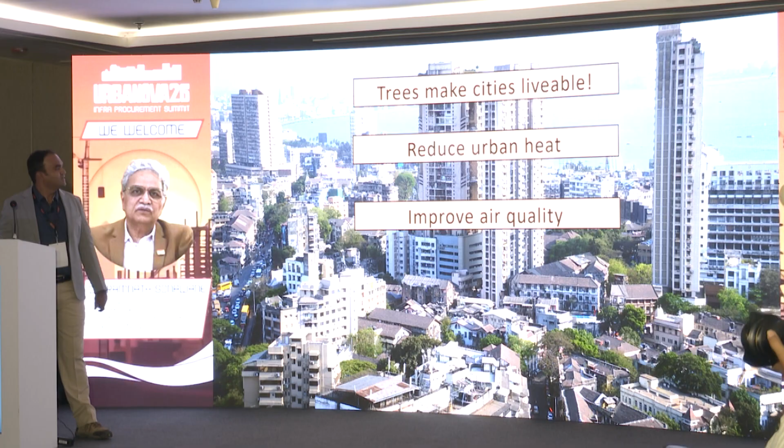This is also a no-brainer. We are seeing all the repercussions of construction and air pollution in the city, the bad air quality that we have. And trees are the organisms which help improve the air quality of the area.

It also helps improve the mental well-being of our people. If you don't believe me, just look outside the window. You can see beautiful trees and tell me you're stressed by looking at that view.

It also helps increase property value. This is very important for business owners and project owners, because people think trees are a liability and it's costing them money. But the more trees you have in your property - I'm not talking about trees you plant after construction, but the trees which you retain in your project during construction - those trees will help increase your property value.

I like to bring this out in the first 5 minutes of a presentation. And I understand the challenges that you, as engineers and project managers, have to go through in managing trees while building big roads and big buildings and everything.

And we understand the challenges you have, specifically working in a complex urban environment. One of the speakers previously mentioned they had to deal with 42 utility companies just to construct a road. I would say you now have to deal with 42 plus 1. Trees are also part of infrastructure now, so you need to think about those trees as well.

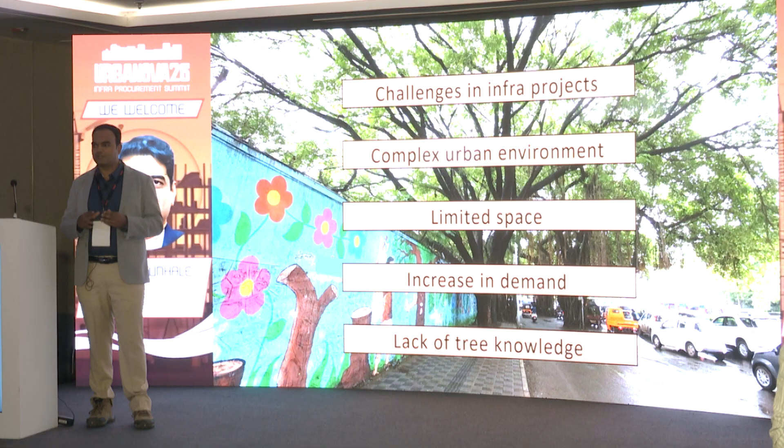And throughout all this, the big challenge that I see is that there's a lack of tree knowledge, or there's more of a misconception about trees going around. So let me help change that misconception for you.

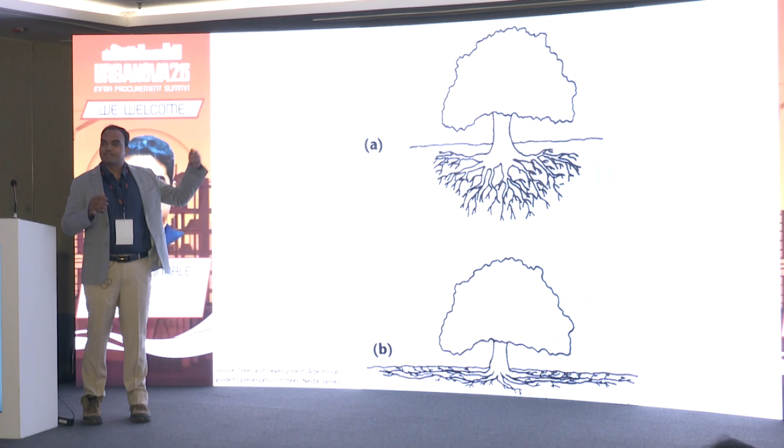Okay, I want a little bit of audience participation once again. By show of hands, could you tell me how tree roots grow? Is it option A, where the roots go deep within the canopy of the tree, or option B, where it spreads all the way around the area and not very deep?

So how many of you think it's option A? Okay, not bad. How many of you think it's option B? My guess was right. So this is the misconception that's going on.

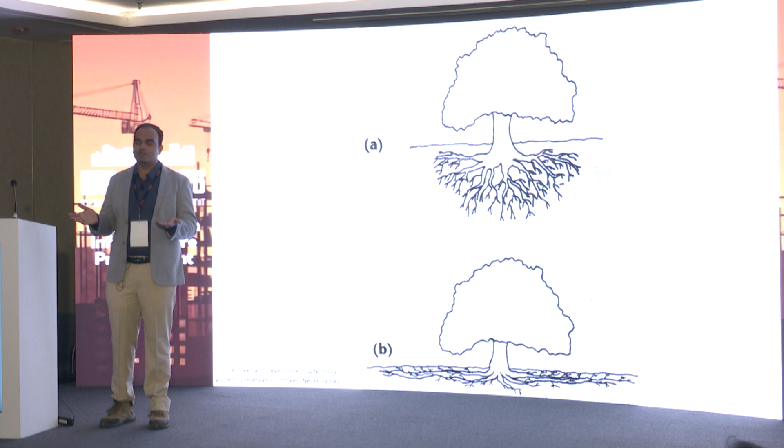Everyone thinks that tree roots stay within the canopy and go very deep into the ground, which has been proved wrong by a lot of scientific journals and papers. A lot of trees have their roots spreading laterally all across, beyond the canopy of the tree. And it doesn't grow deeper than maybe 1 to 1.5 meters, or 2 meters at times. It doesn't go beyond that.

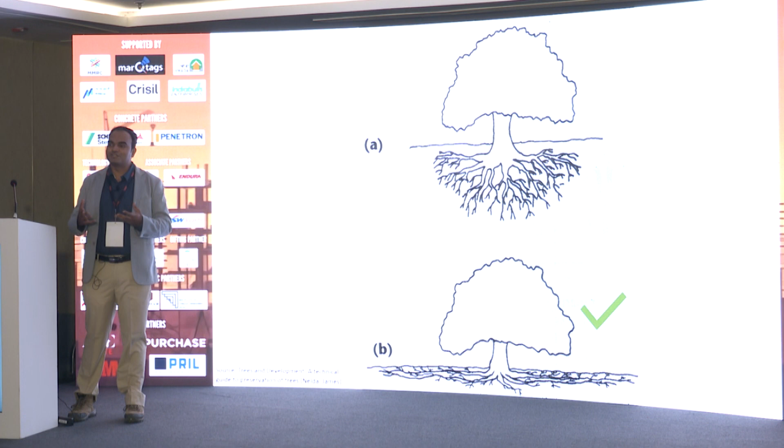But in certain cases, obviously, in dry and arid regions where there is lack of water, tree roots do go deeper down. But in an urban environment, you will not have trees going deeper than 1.5, or at most 2 meters. So I hope you can have some consideration towards tree roots when you build your next project next to a tree.

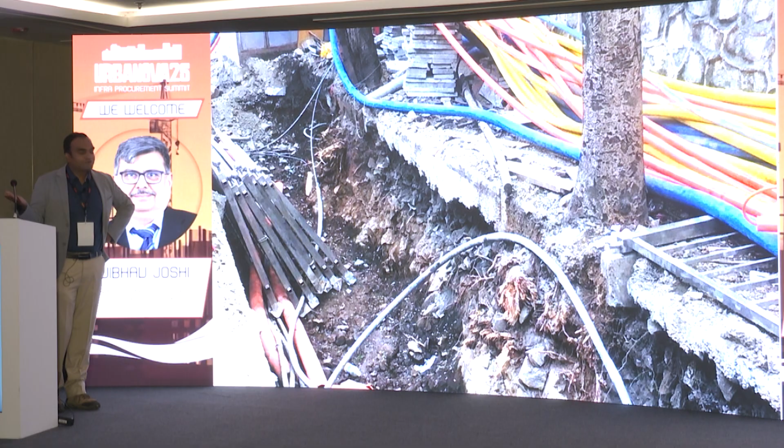To bring it forward, this is a common view that I come across when walking on the streets in Mumbai. Not blaming anyone here, but we could have done better, right? These roots could have been saved, these trees could have been saved.

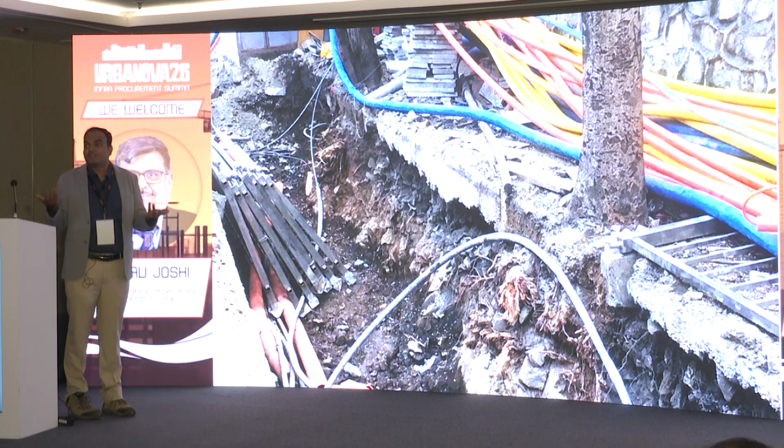They could have been saved because above ground the tree looks fine, but you come out, you do a utility trench, you put in the utility, you fill up the trench, the roots are damaged, and the next monsoon, the trees are falling. So people are dying from falling trees as well now. That's a very big problem we have in our construction industry.

And I don't blame you, it's completely understandable because you have your other priorities, and you need to know that the trees are protected in a way that they stay there for a longer time. But that doesn't happen every time.

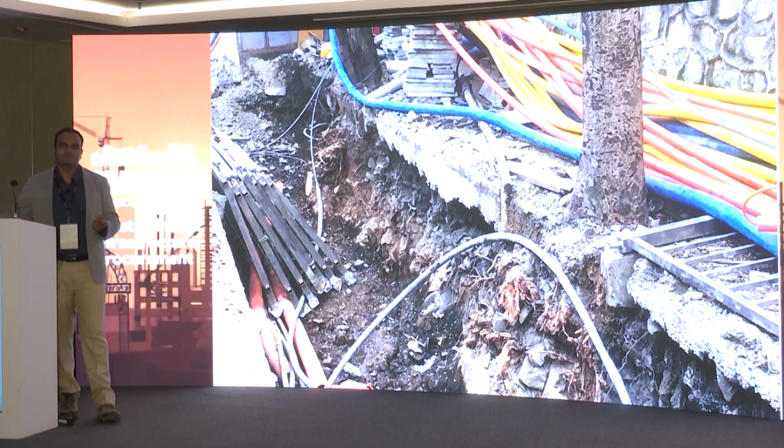And that's why when we work with a lot of engineers and architects, the most common question I get asked is, how close to the trees can I build? And this is the start of an avalanche basically for us. If you're asking this question, that means everything you have done before is wrong.

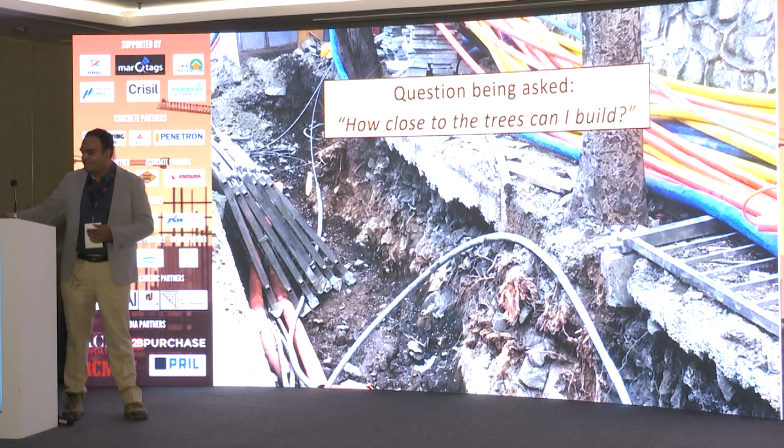What we expect, or what we hope, is that you'll start asking how much space would this tree need? Because your construction also has to go hand in hand with the environment. It's not just on paper, it's not just in your presentation that you're doing a lot of environmental benefits, but also on the ground, the end user needs to benefit from your work. And that is what I'm trying to showcase here.

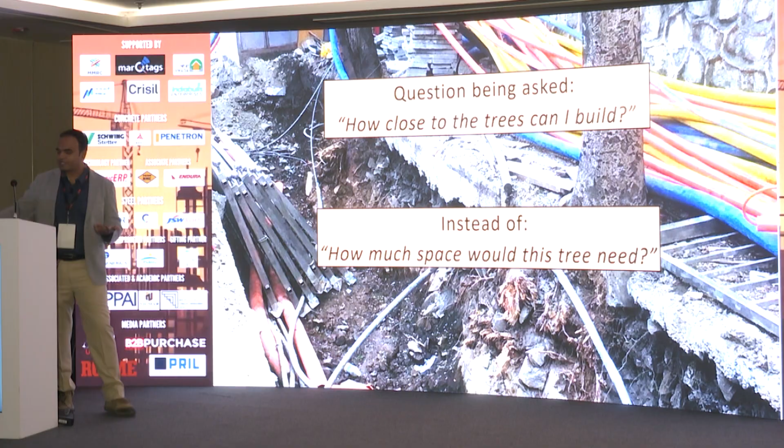To answer this question, a lot of engineers and architects ask us how to do this, but we need to ask how much space would this tree need. So there is no one right answer to it.

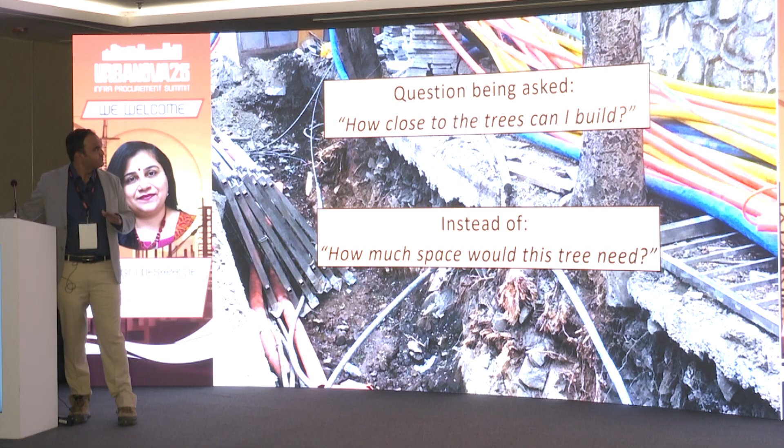To understand the answer, I would like to take you through the phases of construction, which I'm sure you're all familiar with. Notice the change in colors as I go ahead. First is planning, followed by designing. Then you have the pre-construction stage, then construction, and then post-construction.

So at what stage do you think the best tree preservation can be done? It's the planning and designing stage. If you don't think about trees in the planning and designing stage, you would definitely have lost the battle by the pre-construction and construction stage.

We get approached by a lot of companies to save their trees when they've already dug up a huge excavation pit right next to a tree, and they say, 'oh, my tree will fall, please can you come and help me out? Can you fill up the pit for me, please?' Then I can see what we can do. But that doesn't work in the real world, it doesn't work like that.

My urge, my prayer to all of you today is, try and consider trees right from the planning and designing stage, because that makes a hell of a difference. We don't have a magic wand. We cannot come to a site and say, okay, this tree has been protected, it won't fall ever. But if you involve us right from the planning and designing stage, we can identify which trees can be kept and which cannot, and how the ones kept can be protected in a more scientific and comprehensive manner. Anything that happens during construction and post-construction stage with the trees, it's already too late.

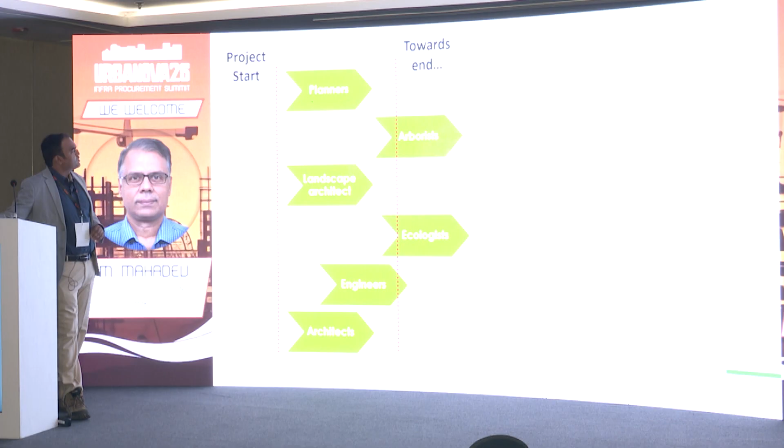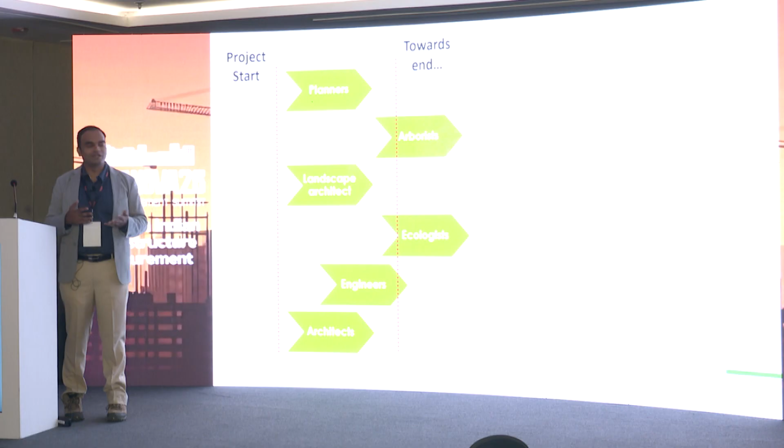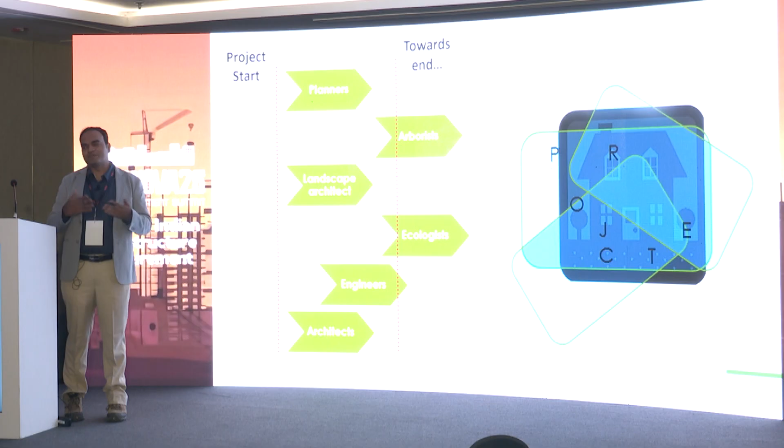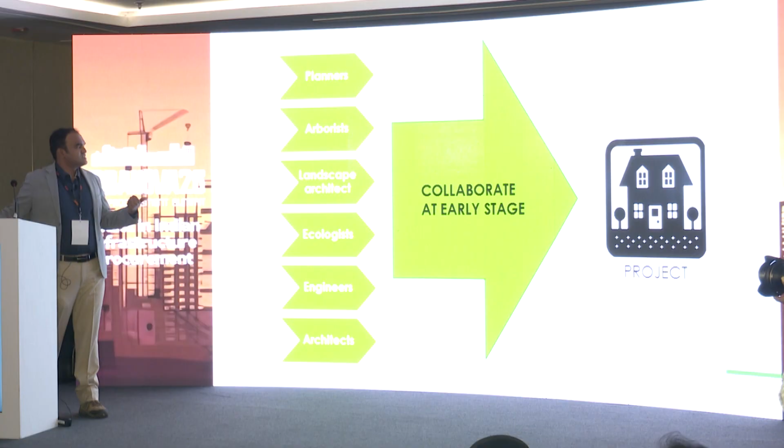Your project is completed, but in a very... so what we suggest is you collaborate at an early stage, get all the experts including arborists and tree experts involved from the planning and designing stage, and then you have a much better collaborative approach towards the project.

So what do we do as an arborist for an infrastructure project? We conduct initial tree survey, do impact assessment, identify design conflicts, define and enforce tree protection zones. We also help optimize which trees to remove and which to retain, assist with changes in the field, communicate with project managers on what needs to be done with the trees, and facilitate completion of projects. So we are there to help you out, not to stop your project.

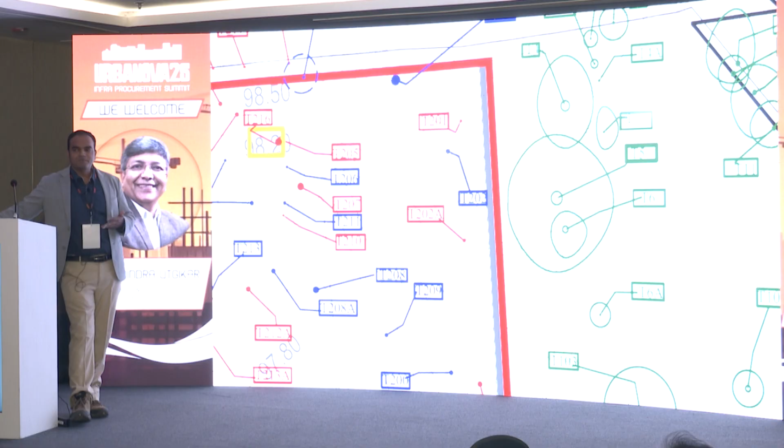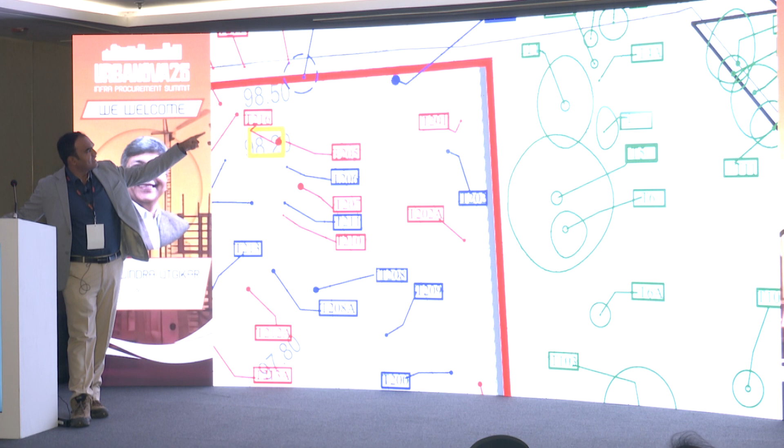So what do you mean by initial field survey and impact assessment? This is a typical plan of a tree survey. On the right, you can see the trees in green with the canopies marked — they are to be retained. The red line is the construction boundary where excavation is going to happen, and all the trees inside are to be removed. This is a very basic approach we take when approached by people during the construction stage or just in the pre-construction stage.

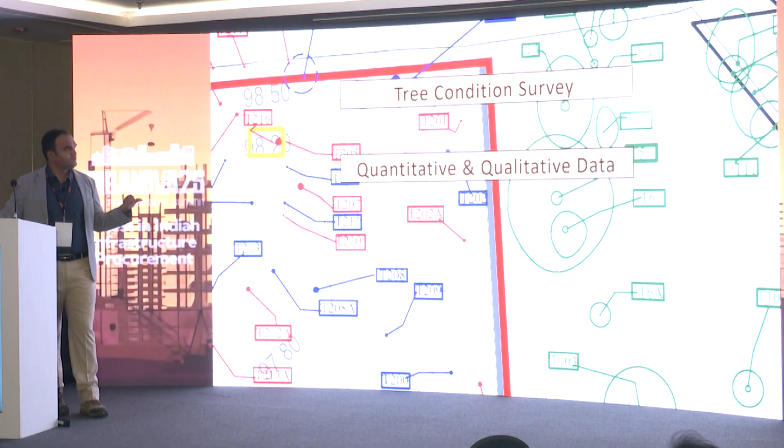So there's hardly anything we can do. We conduct a tree condition survey, collect the data of the tree, superimpose it on your project layout, and tell you which tree to remove and retain. But a better approach to this is doing an impact assessment.

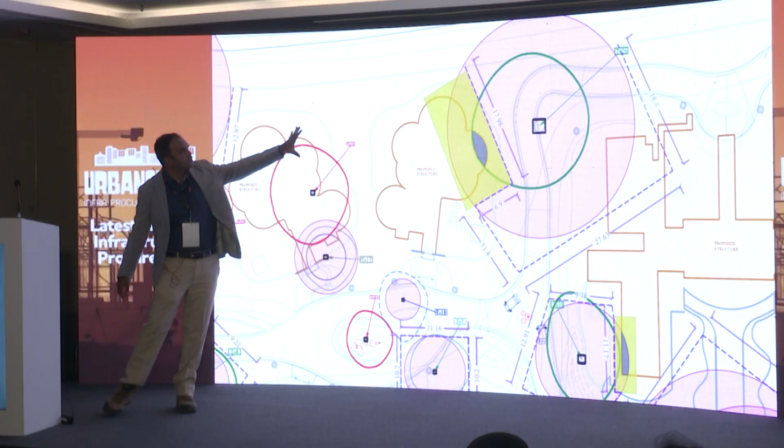So we do a tree impact assessment, or an arboriculture impact assessment, wherein we map each and every tree with their canopies and their root protection zone. This green line that you see is the canopy of the tree. The pink hatch is the root protection area, showing how much ground protection the tree requires for your construction.

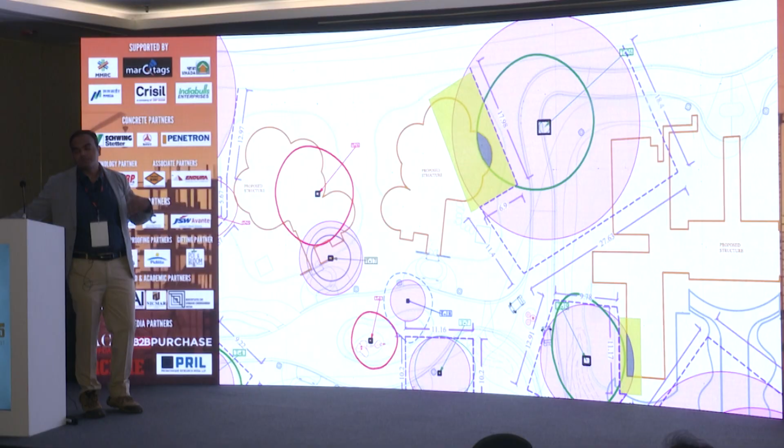Then we recommend which areas need ground protection and where pruning is required. All this planning is done, and the trees marked in red are the ones which need to go, because there's no way we can save them. If there's some design flexibility, yes, we can save them. In some areas, we've tried to keep the tree as much as possible. This is what we try to help you out with — engineers and architects — with regards to trees.

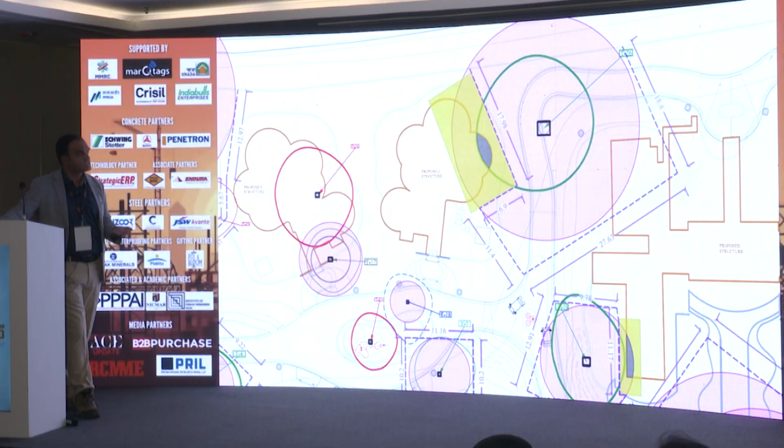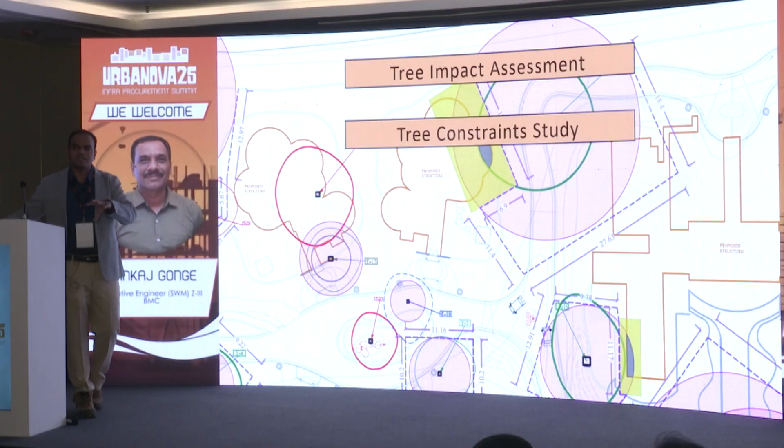It's called a tree impact assessment, and it also includes a tree constraint study. So we identify areas where there's major conflict between the trees and the construction, and we help you minimize those conflicts. We give you tree and ground protection plans.

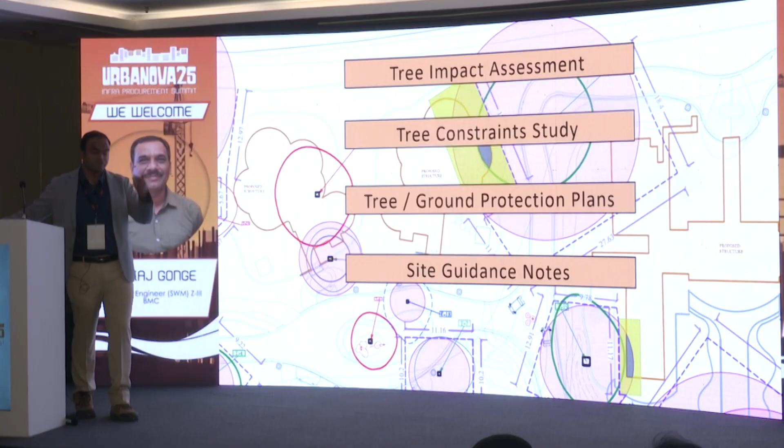We give you site guidance notes on how to go about it. We don't just talk about it, we give you a proper methodology and a method statement about how to go about it.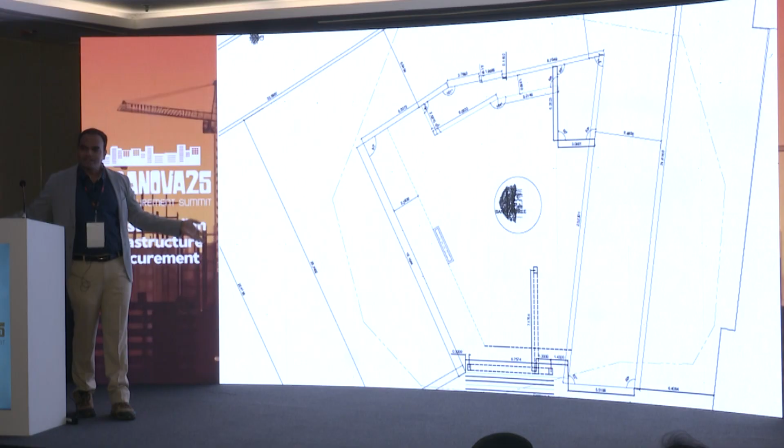They showed a tree in the middle of the building, and they said, okay, this tree needs to be saved. We were like, this is not possible, we need to go back to the design board and come back with better plans. But they said no, everything is in place as usual, we have to go ahead with the plans now.

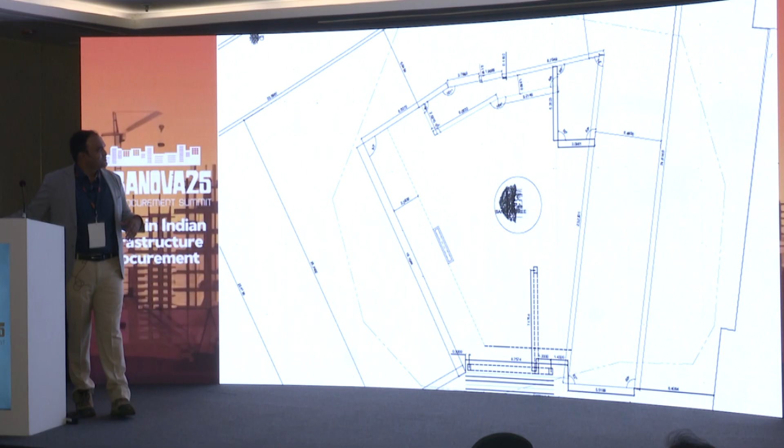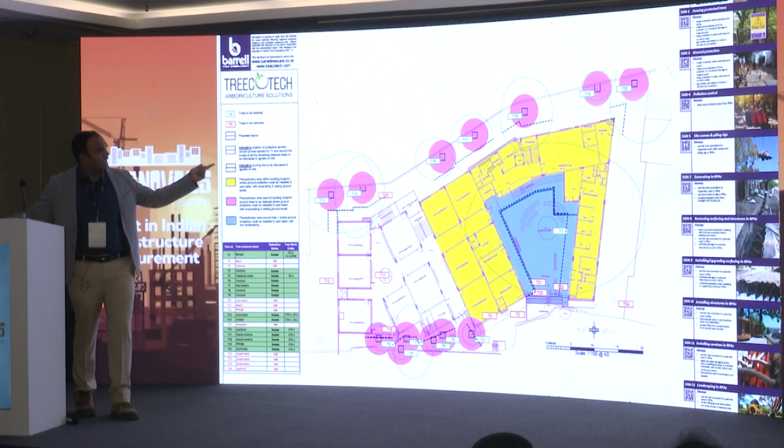So we went to the site and did the assessment. This is what we came up with - a very simple but very effective plan. The hatch in yellow is where all the ground protection measures need to go, and the hatch in blue is where all the root protection measures need to go.

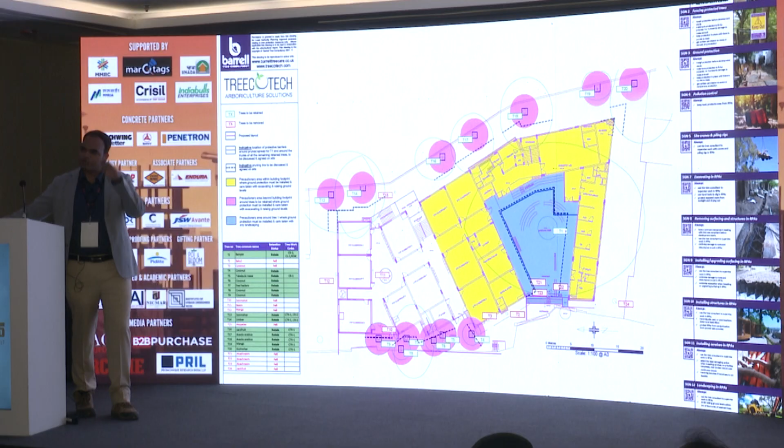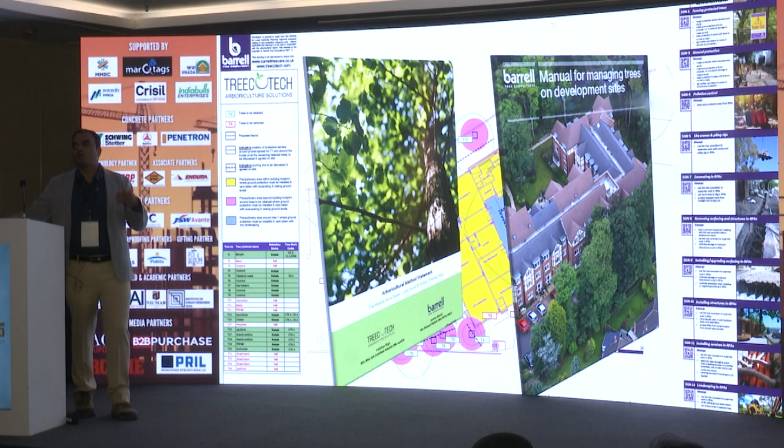With all the measures given in the plan itself, site engineers can quickly scan a QR code and see what needs to be done, along with all the method statements. We also supply a method statement and a manual for managing trees on development sites, so people on the ground will know exactly what to do when the trees are there.

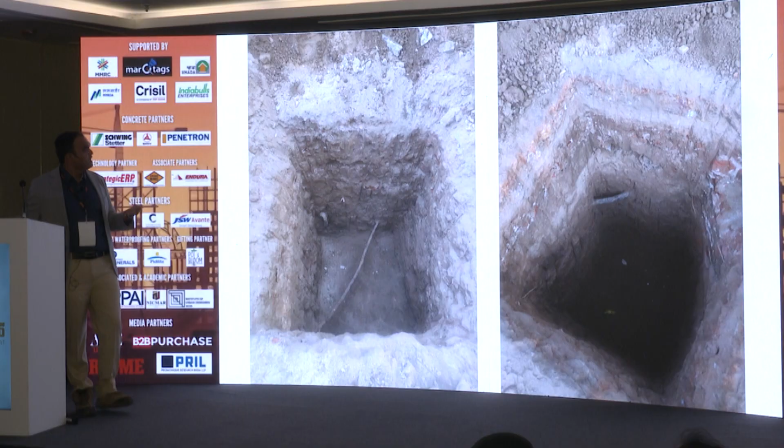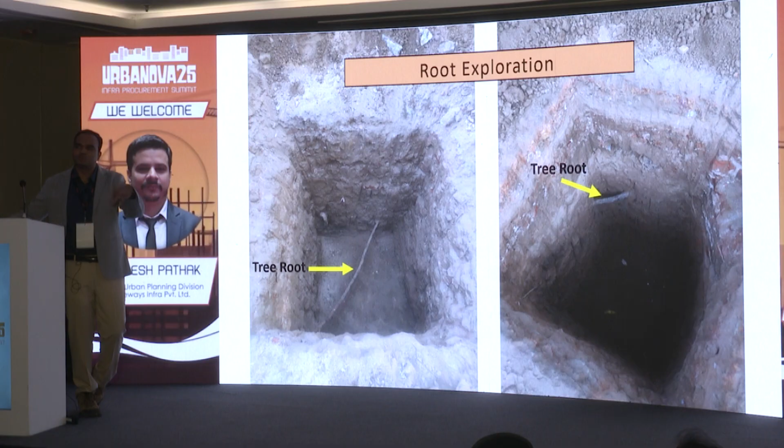This was done before construction happened. And then during construction, we tried to retain as much of the canopy as we could. Some of the canopy branches were passing through the cafeterias of the building and other parts, which was thanks to the architect who allowed us to do that.

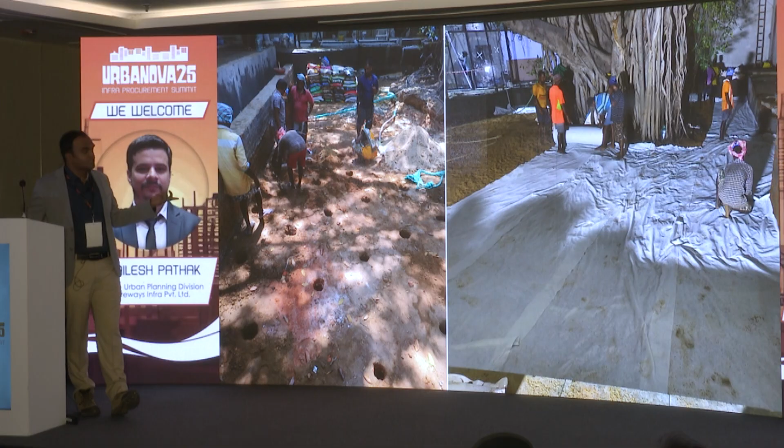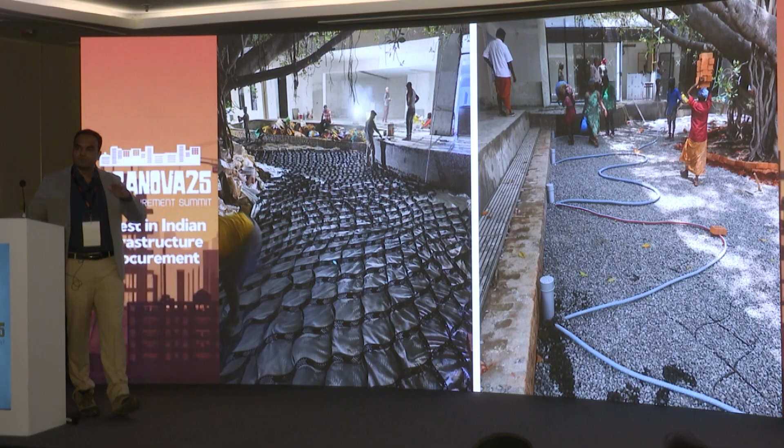For the ground protection around the tree, we did a lot of interventions - vertical mulching, improved the quality of the soil, decompacted the soil. Then we laid out this load distributing material on the ground, because pedestrian walking causes a lot of soil compaction which is not good for the tree. So we use these load distributing modules which help distribute the load of pedestrians and vehicles.

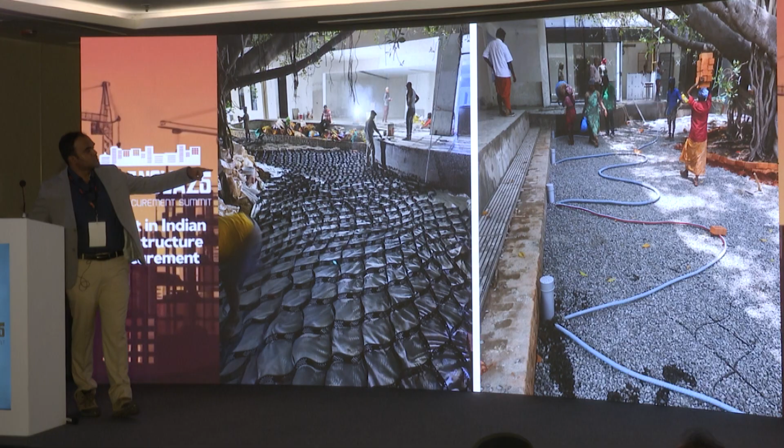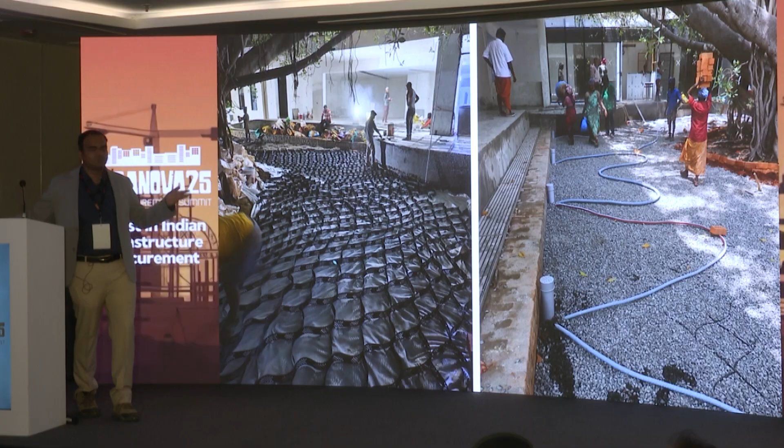We also put in perforated pipes all along the root area to allow exchange of air and moisture, so the tree won't realize there's a layer on top of it, but will continue to grow naturally. This is to protect the root area. On top, the area was filled up with permeable paver blocks, allowing air and moisture to go into the root zone.

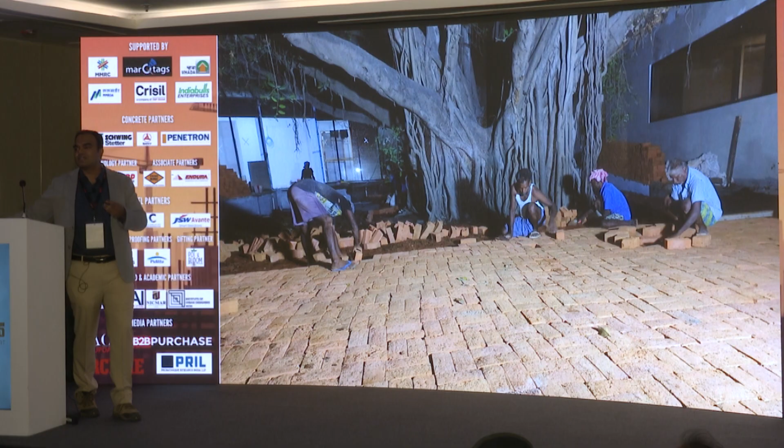Just to a quick conclusion: trees are also infrastructure. Please consider trees as infrastructure, as an asset, not as a liability, and try to be part of the change. Try to ask the question of how much area the tree would need, rather than how close you can build to the tree. Include tree assessments in the planning phase itself.

That is very, very important, and have some design flexibility. This can only be done when you include tree assessments in the planning phase. At the construction stage, you cannot change any design, so that might create a lot of unwanted decisions. And hire the right experts and right technology for your tree management in your projects. That's all from me, thank you so much.